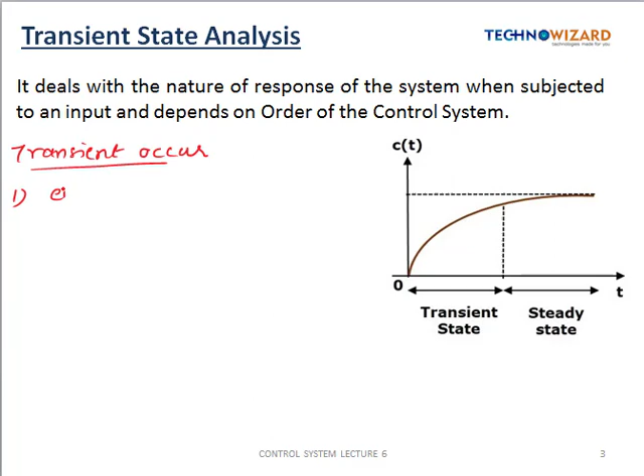So let me write what are the reasons why the transients occur. Transients occur first because of energy storing elements present in the system, like L and C, because they won't allow the sudden change in current and voltage. Also, if we suddenly apply the input or disconnect the load, transients occur.

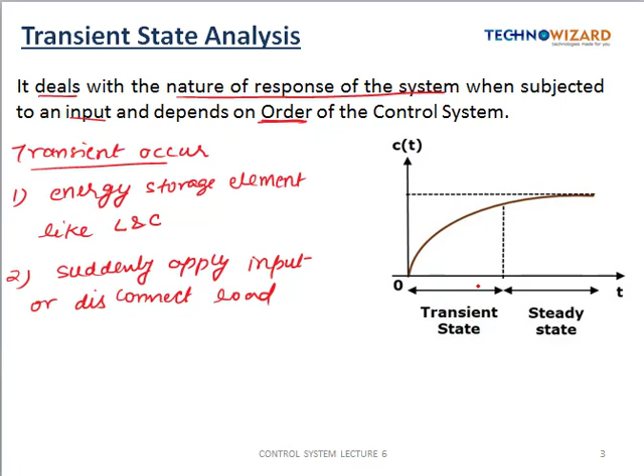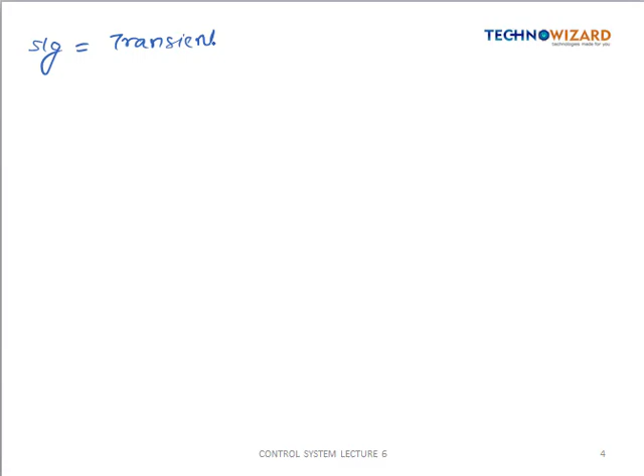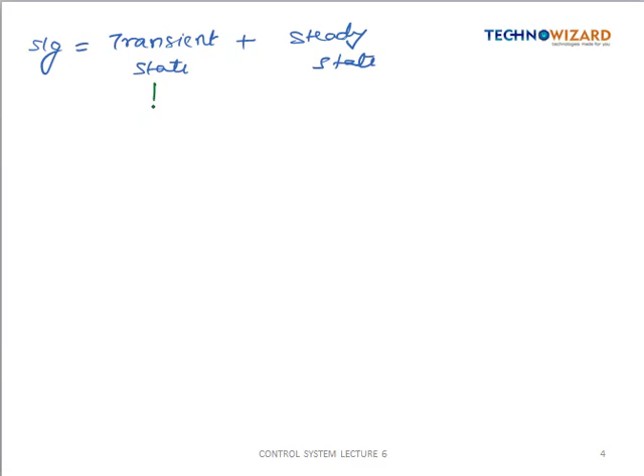So the transient state will depend on the order of the control system, and the steady state will depend on the type of the control system.

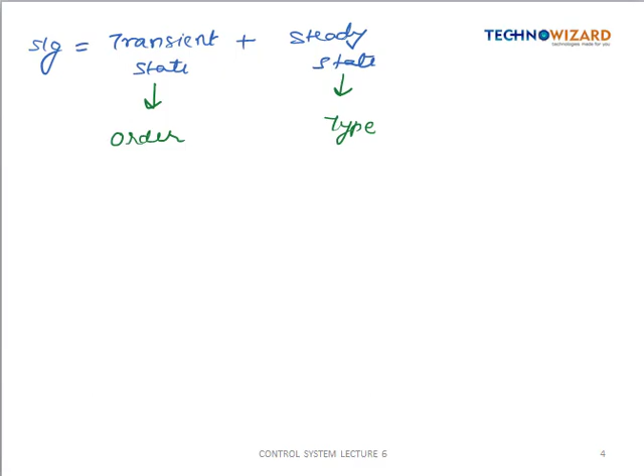I have already explained in the previous lecture that order is obtained from the closed loop transfer function. The closed loop transfer function, or characteristic equation, has the highest power of s which will indicate the order of the system. The characteristic equation is given by 1 plus GH equal to 0, and the highest power of s in it will be the order of the system.

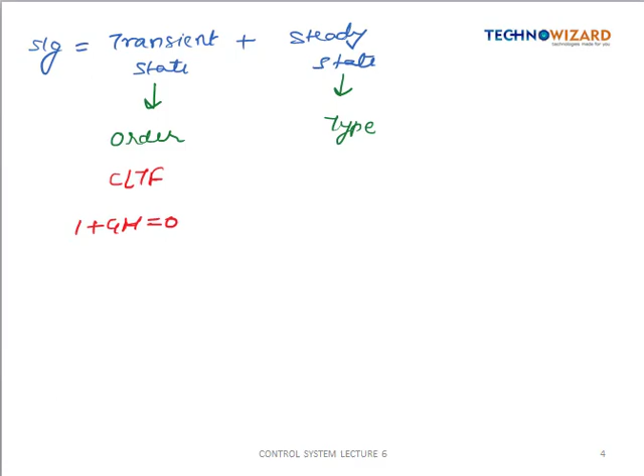Similarly, type is obtained from the open loop transfer function, that is G of s into H of s. The number of poles lying at the origin will indicate the type of the system, and generally the value of H of s is 1, that is we consider the unity feedback system.

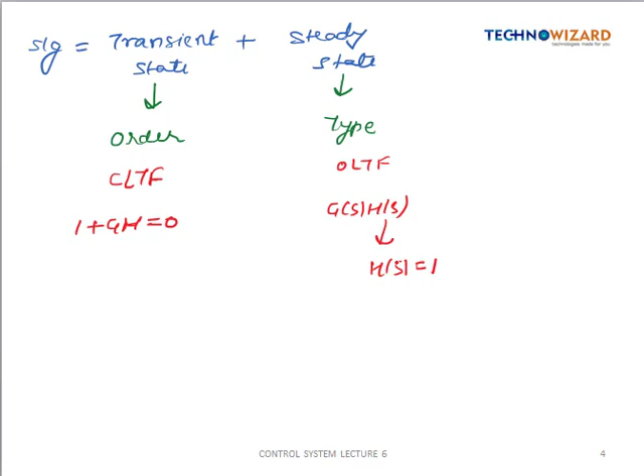So next let us see what is zero order system. First, let us see the generalized representation of a transfer function. We know that transfer function is defined as Laplace of output by Laplace of input, C of s by R of s. The generalized representation is b naught by a n s power n plus a n minus 1, these are the coefficients, s power n minus 1, so on up to a 1 of s plus a naught, which is a constant.

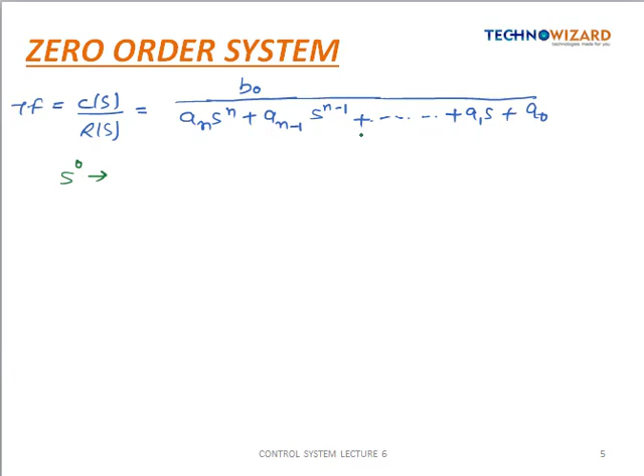Now we are talking about the zero order system. Zero order system means the highest power of s in the transfer function, in the denominator, will be zero. It means s power will be zero. So here it means all these terms will not be considered in the zero order system, because we need s power 0 in the denominator.

So it means transfer function for the zero order system will be equal to b naught by a naught, and the system has some gain present in it. So if we let k be the gain of the system, in this transfer function the gain value will be b naught by a naught because this is a constant. So it means our transfer function for the zero order system will simply be equal to k. So this is the transfer function for a zero order system.

It means for zero order system, output is proportional to input, that is C of s is proportional to R of s. So if we plot a graph between the output and the input for the zero order system, it will be linear, that is output is varying proportional to the input.

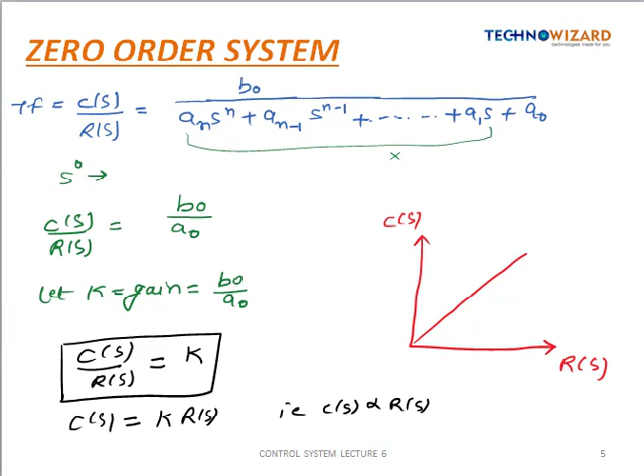Examples of the zero order system are measuring instruments like potentiometer. So example of zero order system is potentiometer.

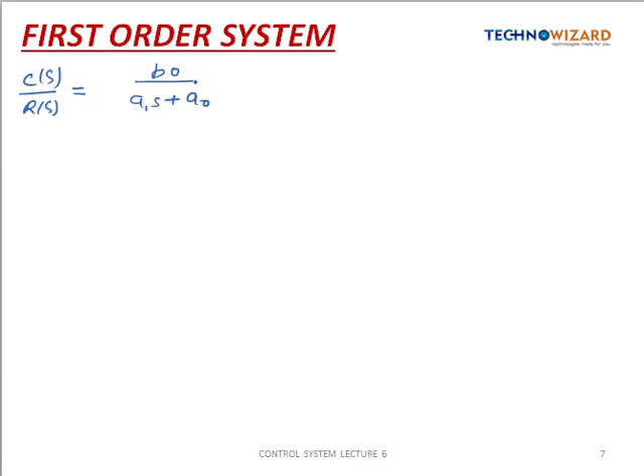Next we have the first order system. The first order system's transfer function will be C(s)/R(s). As it is first order, in the denominator the highest power of s will be 1. So this will be given by b0 by a1s plus a0. Now let us represent this in the time constant form, which is 1 plus Ts.

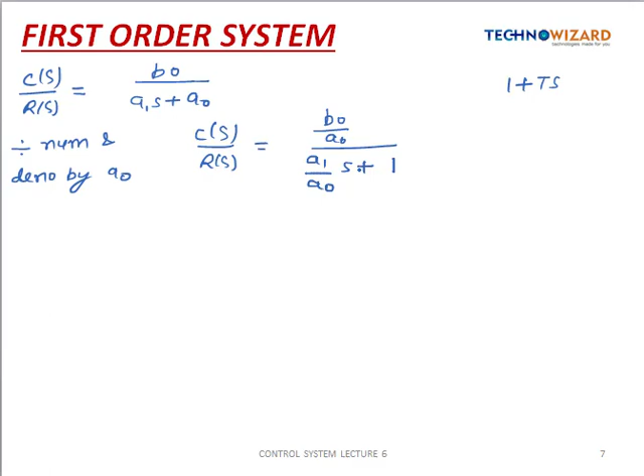Let us divide the numerator and the denominator by a0. So C(s)/R(s) will be equal to b0/a0 by (a1/a0)s plus 1. Now this is represented in the time constant form. Let K be the gain of the system, so the gain value is b0

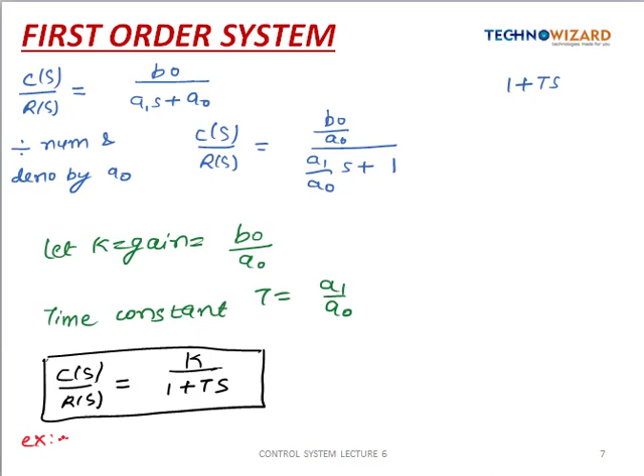For example, thermal systems, like the thermometer, are examples of first order systems in which delay is present, right? Thermometer and liquid level system are some of the examples of first order system. Also RC network or RL network are examples of first order.

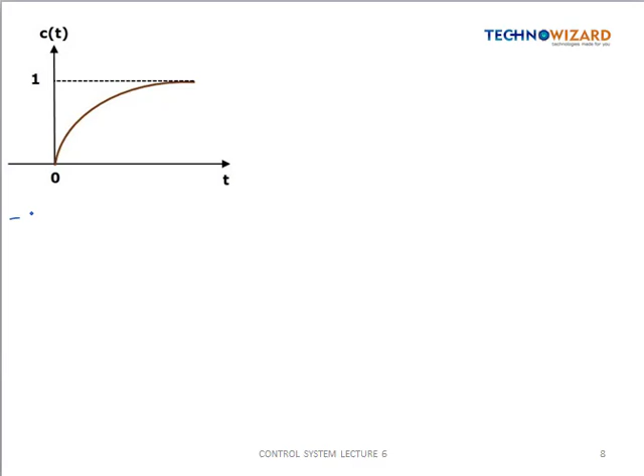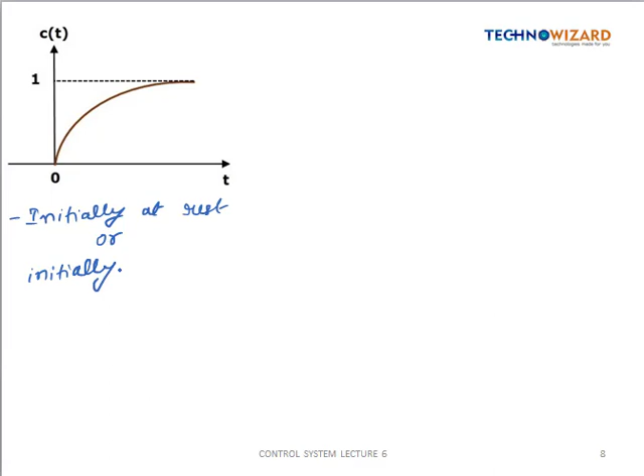Ideally the time constant is defined as the time it will take to reach the final value. But practically it is defined as the time taken by the response to reach 63% of the final value K, that is 0.63. Next possibility is that it will not start from 0.

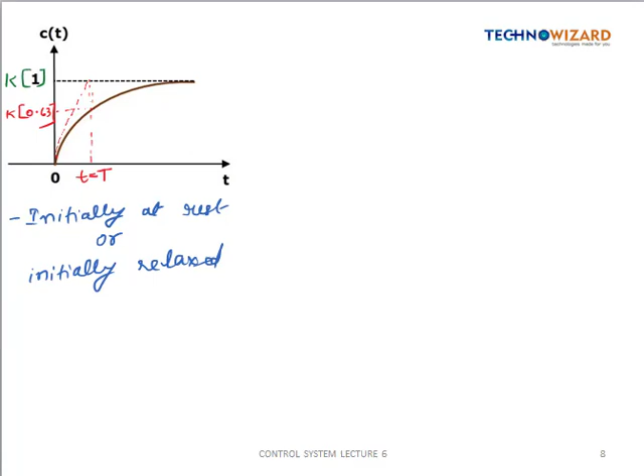It means the system initially has some value. Here we have t, and here we have c(t). Suppose the waveform is something like this; it means the system initially has some value Ki and it is reaching up to K0. Such systems are initially not at rest, that is they are holding some value.

If we look at the expression of its output, we know that the expression for the output is given by C final plus (initial minus final) into e to the power minus t by time constant. So for C(t), the final value the output reaches will be equal to some K; it can be one or anything, right?

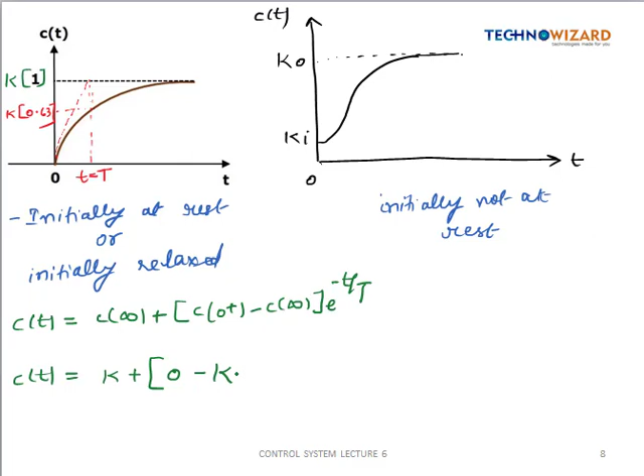Initially the system is at rest, so it is starting from 0, minus K into e to the power minus t by tau. So the C(t) expression when the system is initially at rest is given by K minus K into e to the power minus t by capital T, where capital T is the time constant. This is the expression when the system is initially at rest.

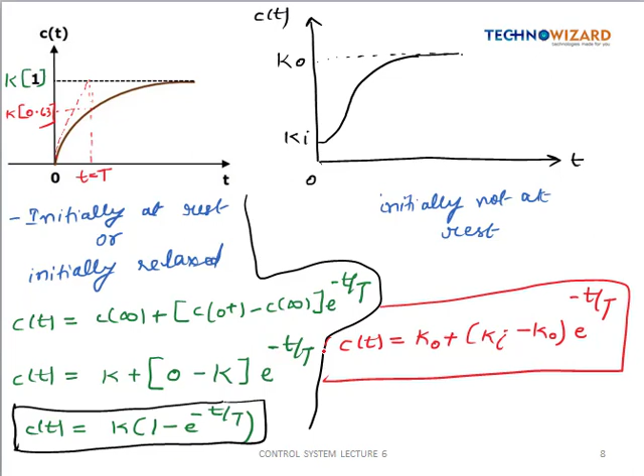Now if the system is not initially at rest, what will be the expression for the output? It will be given by final value K0 plus (Ki minus K0) into e to the power minus t by capital T. This is the expression when the system has some initial value Ki. Now let us see a question to understand this concept.

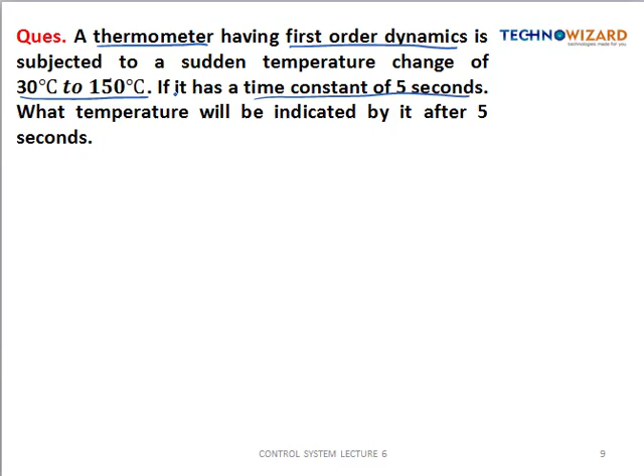A thermometer having first order dynamics, and I have already explained that the thermometer comes under first order systems, is subjected to a sudden temperature change from 30 degrees Celsius to 150 degrees Celsius. If it has a time constant of 5 seconds, what temperature will be indicated by it after 5 seconds? So here there is a sudden temperature change from 30 to 150 degrees Celsius.

It means the thermometer initially has the value Ki and it is reaching up to 150, which is K0. The system is first order, so its output expression will be K0 plus (Ki minus K0) e to the power minus t by capital T, the time constant. The time constant is given as 5 seconds. We have to calculate the thermometer reading after 5 seconds.

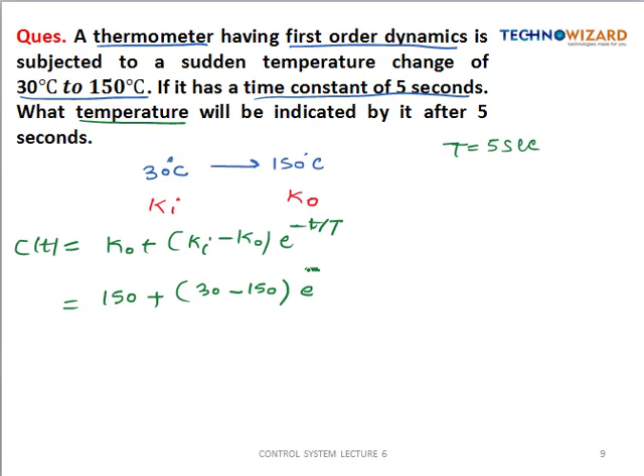So K0 is 150, plus Ki of 30 minus 150, into e to the power minus t by T. We have to calculate after 5 seconds, so it will be 150 minus 120 into e to the power minus 1, which is 0.37. So we get C(t) as 105.6 degrees Celsius. This is the answer for this question.